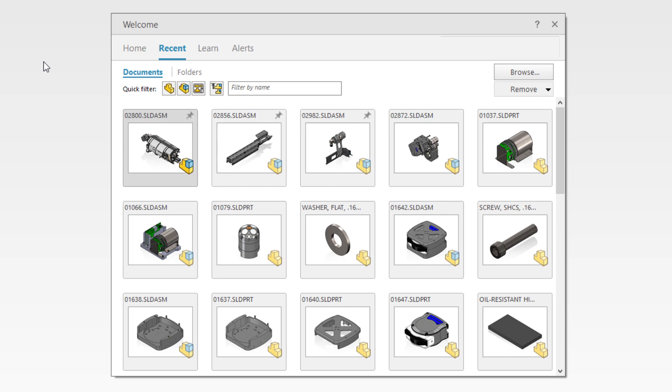You demand the best performing tools so you can work as efficiently as possible. SOLIDWORKS 2021 delivers multiple new enhancements to access your data faster and work more efficiently.

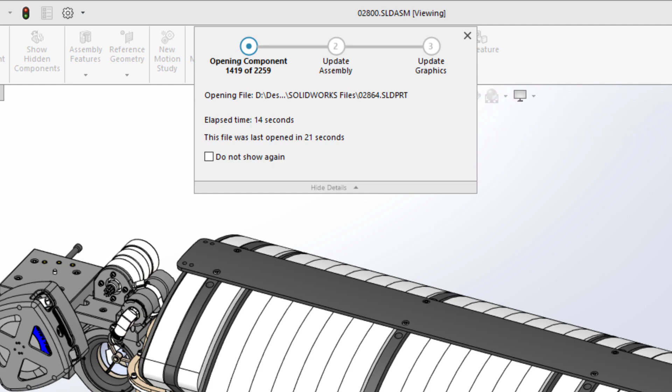Open times for both resolved and lightweight assemblies have been improved in SOLIDWORKS 2021. This 2259 component assembly opens in only 21 seconds, making getting into your designs faster than ever. The larger the assembly, the greater the gains you will see while opening them in lightweight mode.

To improve working with lightweight components, there is now also a more streamlined approach to accessing their assembly and feature information. Simply expanding a component from the Feature Manager tree will now dynamically load those components on demand, giving you access to the fully resolved subassembly or part.

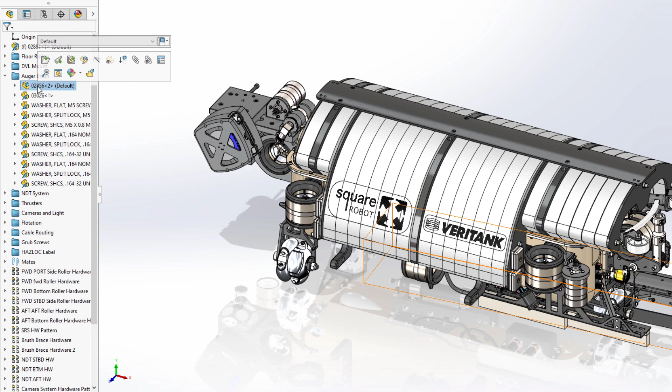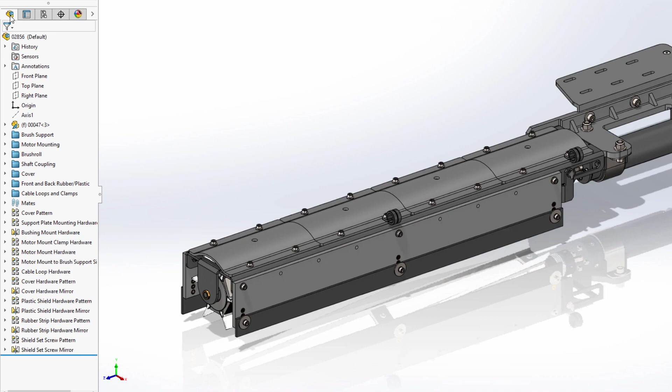This prevents unnecessary loading of large assemblies, but also allows you to quickly access and resolve the components you're working on as needed. Working with configurations in SOLIDWORKS 2021 is now also faster. Both switching between and creating new configurations are now significantly faster for assemblies.

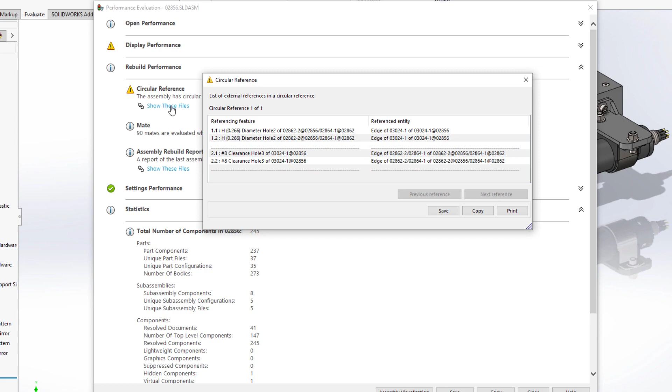The performance evaluation tool within SOLIDWORKS has always been an invaluable resource to give insight into areas of a design that may cause performance degradation. New for SOLIDWORKS 2021 is the analysis and reporting of circular references within an assembly. In this case, two holes on two separate parts have been found to reference one another.

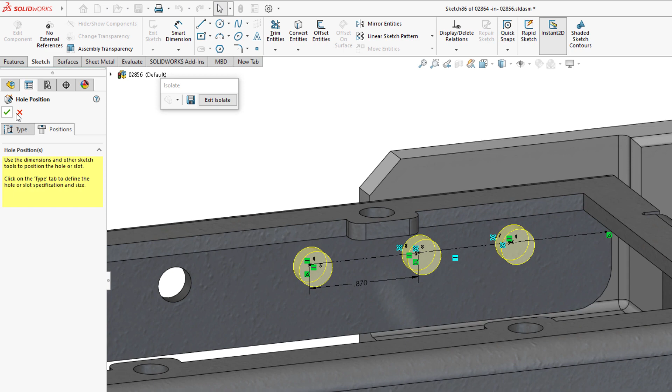You can use this information to further investigate the design and determine how they're referencing one another to fix these issues. In this scenario, one of the components listed in the report contains a hole wizard feature, where its location sketch has center points that are referencing the edges of a hole in the adjacent part to locate them concentrically. This is a common top-down design practice to ensure that holes always remain aligned to one another.

However, on investigation of the second component's feature, also a hole wizard, it appears that the center points within this sketch are likewise referencing the edges of the previously interrogated holes. This creates a circumstance where both features are trying to define the location of each other, or a circular reference.

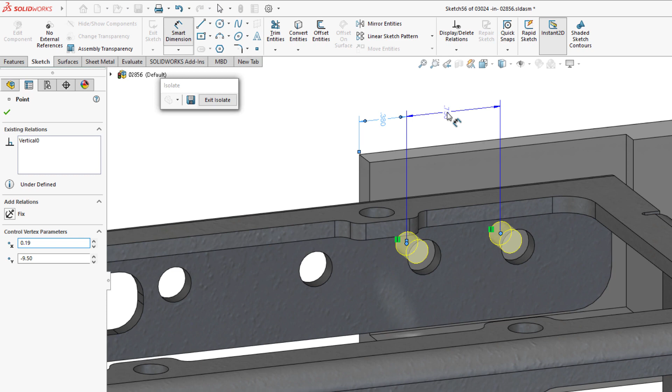To fix this scenario, the best course of action would be to remove the external references and redefine the location of the hole centers in one of the sketches, in this case dimensionally to the part they reside within. Once the changes have been made, a quick rebuild removes any warnings from the assembly.

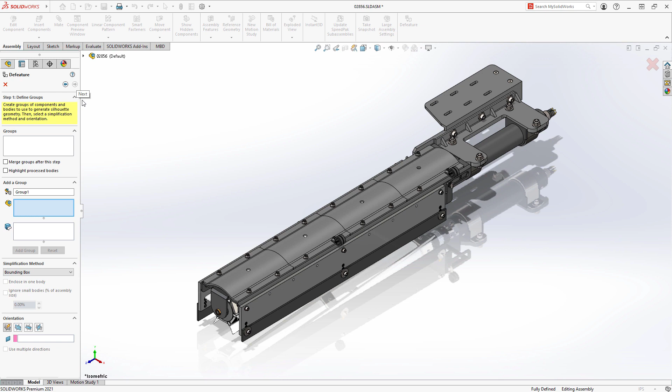Finally, you can use Silhouette Defeature, introduced in SOLIDWORKS 2019, on an assembly to create a simplified representation of it, or to protect proprietary information. Silhouette Defeature provides an intuitive step-by-step workflow to define this simplified version using a variety of geometry simplification tools.

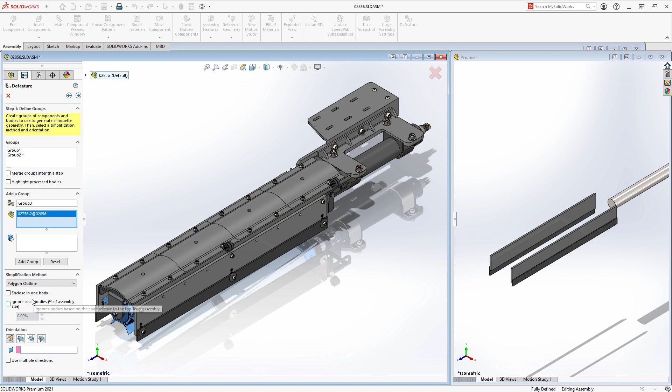While you are selecting the components, bodies, or subassemblies you want to simplify, you will always have a side-by-side view to show what your finished representation will look like. This ensures that you can capture the correct amount of detail. The methods you can use to simplify your geometry range from something as simple as a bounding box or cylindrical representation of the components, or something a little more complex, like the polygon or tight fit methods, which add a little bit more detail to the final results.

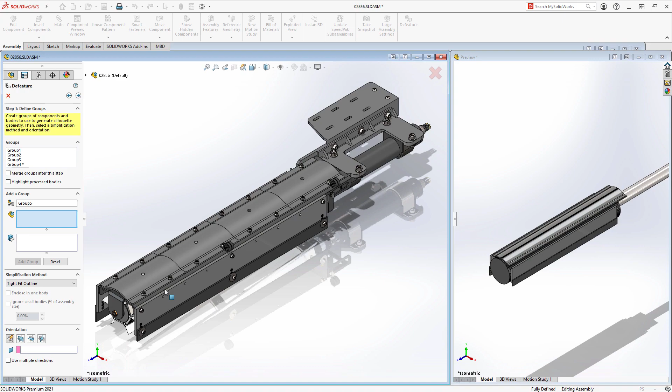Perhaps some of the components in your subassembly are critical to show in a top-level design, even within a simplified representation. For those instances, you can choose the copy geometry method to capture all of the detail of those components, bodies, or subassemblies.

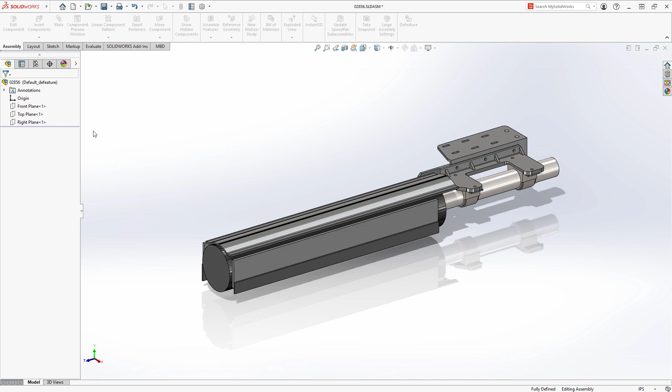What's new for Silhouette Defeature in SOLIDWORKS 2021 is the ability to save this simplified representation as a configuration within the same assembly from which it was created. This eliminates the need to manage a separate file that contains the simplified model. You may still want to use those other methods when using Silhouette Defeature to remove proprietary information from a design to share outside of your organization as a separate disconnected file.

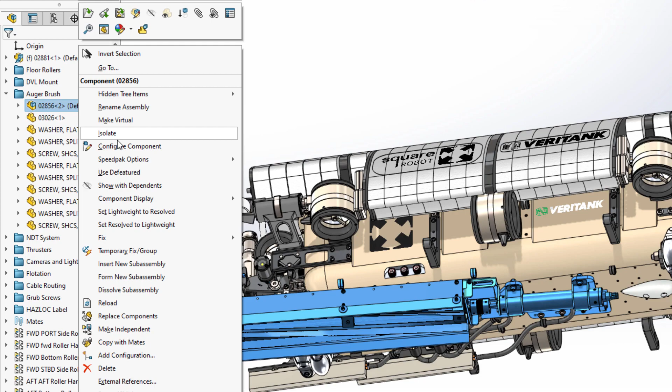However, when using defeatured models within higher level assemblies, it is now as simple as right-clicking on the component and choosing to use the defeatured version. Defeatured assemblies as configurations provide a way to both simplify complex assemblies visually and also add a performance boost in cases where the detail of the individual components isn't necessary.

With these new performance-oriented features in SOLIDWORKS 2021, you will be able to work faster and more efficiently with larger and more complex designs.